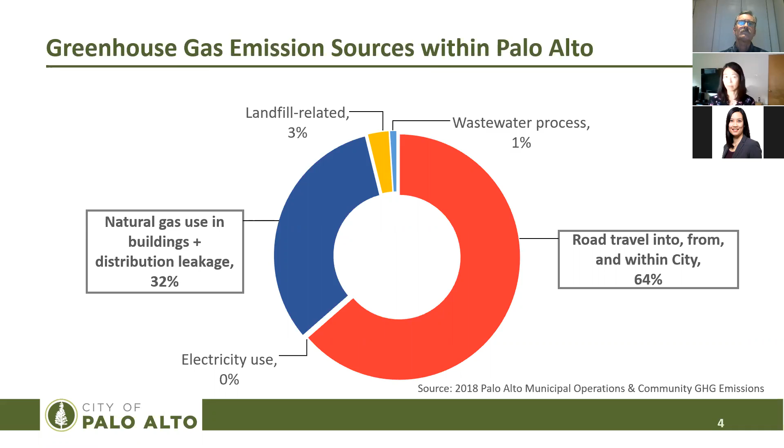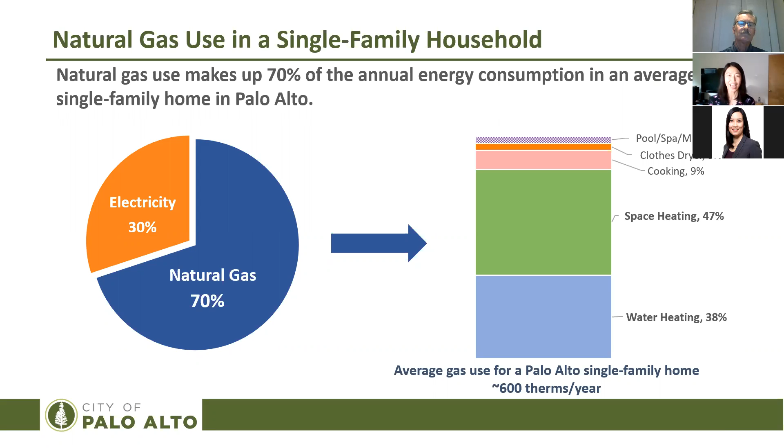So you might ask, isn't natural gas a clean energy source? Well, natural gas is a fossil fuel, and it's usually found in layers of rock formations or in tiny pores within shale formations. Shale gas is extracted by a process called fracking, which is a controversial topic because of its damaging environmental impacts. Natural gas is a mixture of hydrocarbons, primarily methane. It also contains natural gas liquids, such as ethane, propane, and butane, and traces of nitrogen and hydrogen sulfides. Natural gas has no color and no smell. However, a sulfur-based odorant is added to give it a rotten smell, which allows people to easily detect gas leaks.

Burning natural gas produces carbon dioxide, which is a key source of greenhouse gas. Other combustion byproducts include carbon monoxide, nitrogen oxides, and sulfur oxides. These pollutants are harmful to your health if the vents for the gas furnace, the gas water heater, and fireplace are not properly installed or maintained. Cooking with a gas stove without proper ventilation can result in unhealthy levels of nitrogen dioxide inside the house, and this can increase the risk of respiratory issues such as asthma.

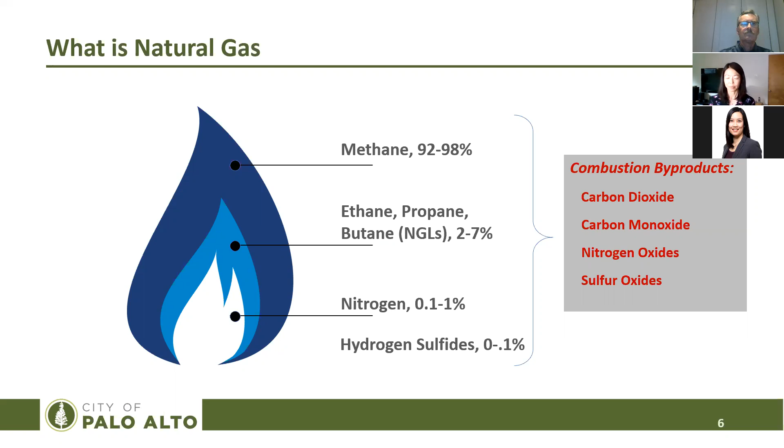There's another problem with natural gas. The natural gas system, from production to transportation pipeline, down to the gas appliances in your home, is leaky. Around 2 to 3% of the methane is leaked from the production and transportation of natural gas into the atmosphere, and then another 0.5% of methane is leaked inside the home. While these percentages may not sound like a lot, methane is a very potent greenhouse gas and has a global warming potential that is 86 times higher than carbon dioxide over a 20-year period.

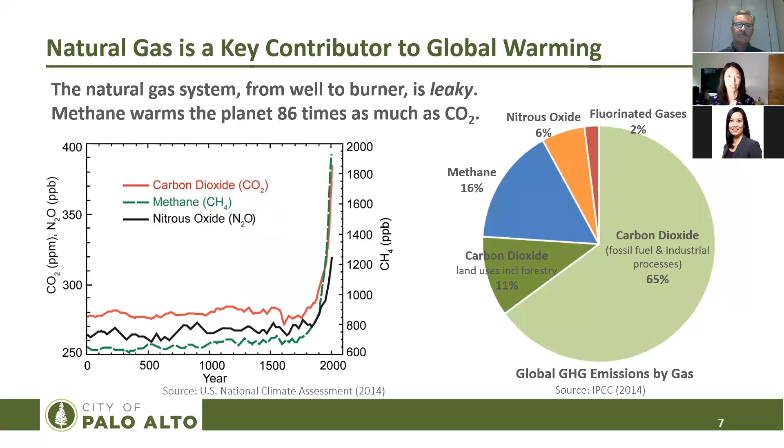So let's turn now to look at where Palo Alto's electricity comes from. Palo Alto electricity has been 100% carbon neutral since 2013. This means that electricity supplied by the city of Palo Alto comes from clean, carbon-free sources, including hydroelectric energy, solar energy, wind, and biomass energy. Palo Alto does not have any long-term power contracts for gas-fired electric generation. At the state level, California has already phased out coal-fired electric generation. By 2045, 100% of the California electric grid will be carbon-free.

With all electric appliances, you get the peace of mind that there will be no risk of gas leaks and no unhealthy combustion byproducts. Also, since there's no open flame from gas appliances, there's also a lower fire risk. So choosing electric is better for your safety, better for your health, and better for the planet.

There are some very efficient electric alternatives to gas appliances, and I'll be focusing on two proven technologies that have been around for decades and are well suited for home applications.

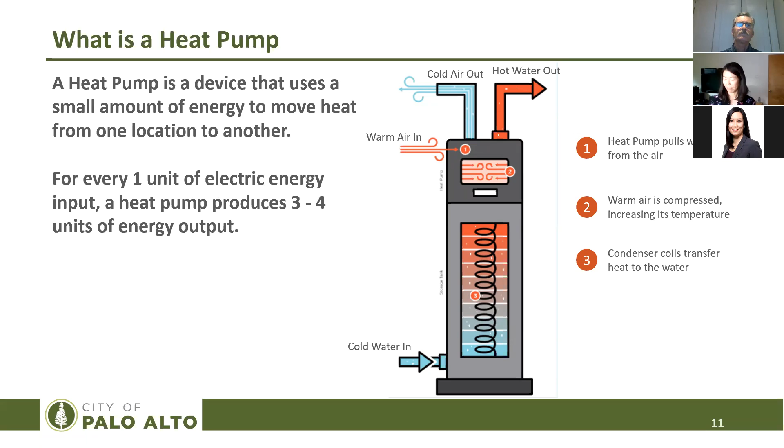So next, we'll look at how a heat pump water heater compares with gas water heaters. All gas water heaters have a flue pipe to send the exhaust gases outside the house. However, there is a risk of backdrafting, which means the combustion gases flow back inside instead of out through the flue pipe. Backdrafting could happen when the air pressure inside the house is lower than the outside. The combustion gases contain carbon monoxide, which is lethal, and that is why California law requires carbon monoxide detectors in homes.

Let's compare the efficiency of different types of water heaters, which is rated using the energy factor. The higher the energy factor, the more efficient the water heater is. Heat pump water heaters have an energy factor that typically ranges between 3 and 4. The energy factor for gas water heaters, on the other hand, is always less than 1. Usually between 0.6 to 0.7 for tank style and 0.9 to maybe 0.95 for tankless models.

Heat pump water heaters also provide smart controls that allow you to remotely control the water heater or save energy when no one's home by setting to vacation mode. If you have a rooftop solar system at your house, you can program the heat pump water heater to run during the hours when you have excess solar output from your PV system.

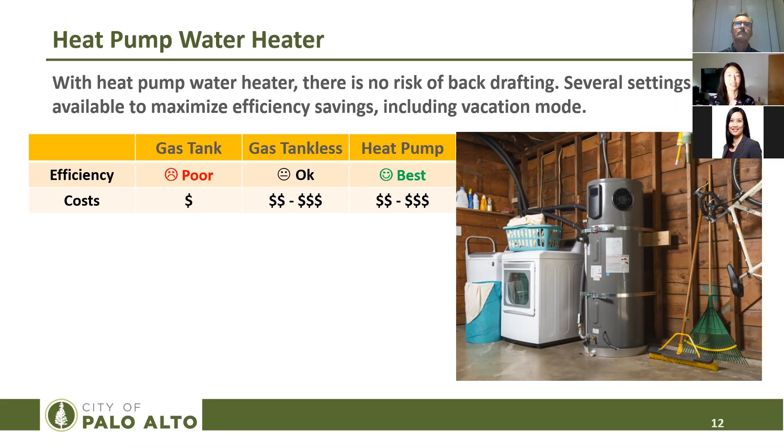So next, we're going to talk about another heat pump application for your home, the heat pump HVAC. A gas furnace can provide space heating only, and an air conditioning system can provide cooling only. A heat pump HVAC can operate in both space heating and cooling mode, and very efficiently.

It also provides good air filtration, which can be very important given the poor air quality we've had over the past few months. Heat pump HVAC systems have two parts: an indoor unit, which is the air handler, and the outdoor unit, which is the heat pump. We'll go over two types of heat pump HVAC systems.

The first type is a mini split. A mini split can have multiple indoor units and does not require ductwork. So they work well for homes with no ductwork and for room additions. The indoor unit can be installed high on a wall or on the ceiling. Mini splits have been around for decades, and they're very popular in Europe and Asia.

The second style is the central heat pump system. If your house has a central gas furnace, then a ducted central heat pump system would make a good fit for your home. Leaky ducts, however, are a common problem and can lose 20 to 30% of the air that moves through the system. So we recommend that you have your ductwork serviced on a regular basis to minimize air leaks.

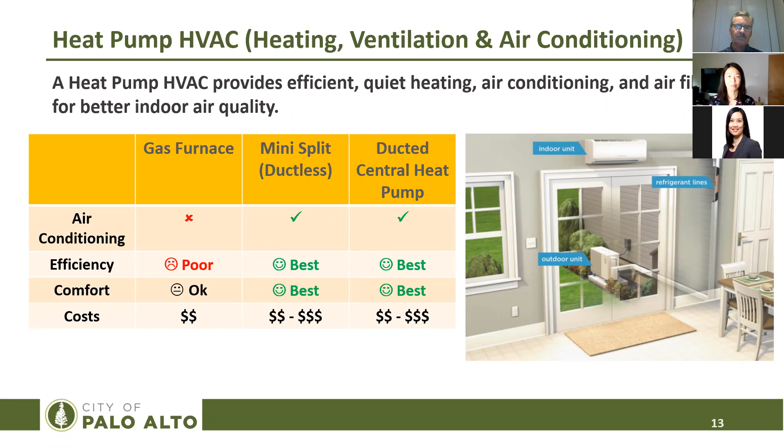Next, we'll turn to cooking. For cooking, we're recommending induction stoves as an efficient alternative to gas stoves. An induction stove uses electromagnetism to create heat inside the cooking pan.

These are not the old electric coil stoves from the 1950s era. The surface of the induction cooktop is usually made of a tough, heat-resistant glass ceramic material. They look like electric smooth-top burners, but the cooking surface never gets hot. When the pan is placed on the cooking zone, the magnetic field induces electrical currents inside the pan, and that heats up the pan. There's no energy lost to the surrounding air.

For cookware, they need to be made of a magnetic material. Cast iron and stainless steel pans work well with induction stoves. If you want to know whether your pots and pans are compatible, you can test them by sticking a magnet to your pan. If the magnet stays on, then it is induction compatible.

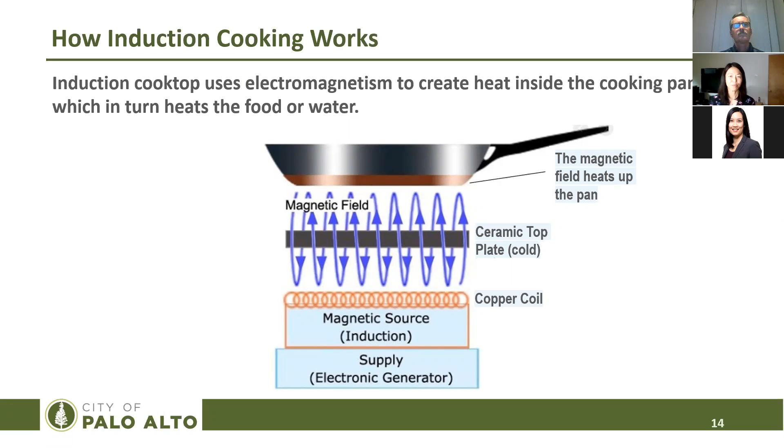When cooking with induction stoves, there are no unhealthy combustion byproducts, and you don't have to worry about the kitchen rag or your copy of a recipe catching fire. There are many online videos that show induction stoves heat faster than gas stoves.

I will now turn over to Scott to talk about how to plan for your home electrification.

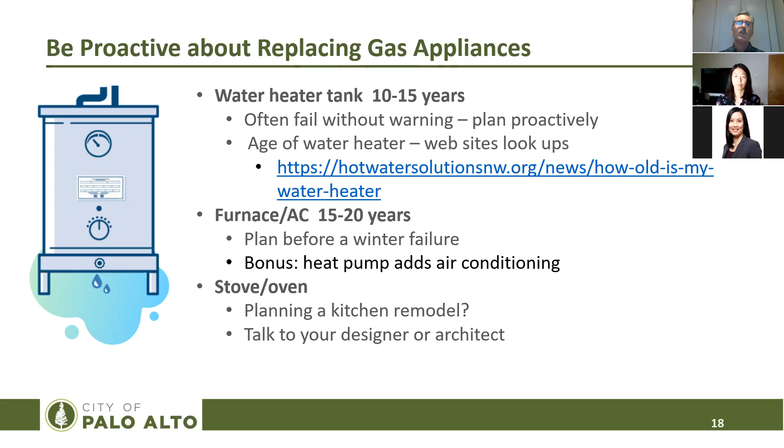So once you know the age of your appliances, you're on the path to electrifying your home. If you've not remodeled and live in an older home, you may need to consider the electrical panel. That's the box on the side of your house with the circuit breakers, or maybe even fuses if you have a really old house. Its capacity may be a factor in this journey.

Most older homes have a 100 amp panel; remodeled, upgraded, and most newer homes will typically be 200 amps. Because your home's comfort and efficiency are heavily dependent on your home's building shell or envelope, that's often what we call insulation, it's important to take into consideration when planning your heating and cooling system.

Most gas furnace systems are grossly oversized, and so your heat pump sizing will be designed to properly meet the home's comfort needs. Smaller equipment is less expensive to purchase and less costly to operate. A well-insulated, sealed home needs less heating, needs less cooling, and is therefore more resilient to temperature fluctuations.

So your steps might be to consider these next actions. You may need to upgrade your electrical panel.

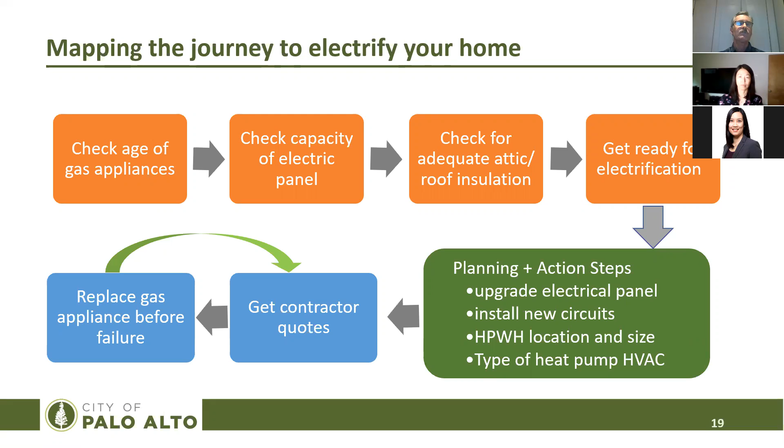So if you want to replace your gas appliances before they fail, you can start by getting some contractor quotes.

So all these steps I just outlined, they might sound daunting, but don't get overwhelmed or intimidated. Just contact the Home Efficiency Genie. Since 2015, the Genie has been Palo Alto utility customers' trusted advisor. If you want to take the first step to electrifying your home, the Genie is here to help.

They offer free, over-the-phone electrification and efficiency advice to all Palo Alto customers. For a nominal fee, they can provide a comprehensive service called a Home Electrification Readiness Assessment. That will evaluate your panel capacity, your existing appliances, and how to plan for more electric appliances. They even can provide a list of electricians who are familiar with panel upgrade projects in Palo Alto.

The Genie also offers independent advice on upgrade projects, including upgrading your insulation and home air sealing, changing your furnace for a heat pump system, or planning for a heat pump water heater.

The Genie maintains a list of qualified vetted contractors who specialize in electrification and home performance. The Genie advisor will not only help you find the contractor, but they can also provide guidance and independent reviews of any bids you receive from those contractors. And this advising service is provided by the City of Palo Alto Utilities just for you.

So your takeaway is start with the Genie. Their web address is efficiencygenie.com. And we'll actually include the Genie web address at the end of the presentation as well.

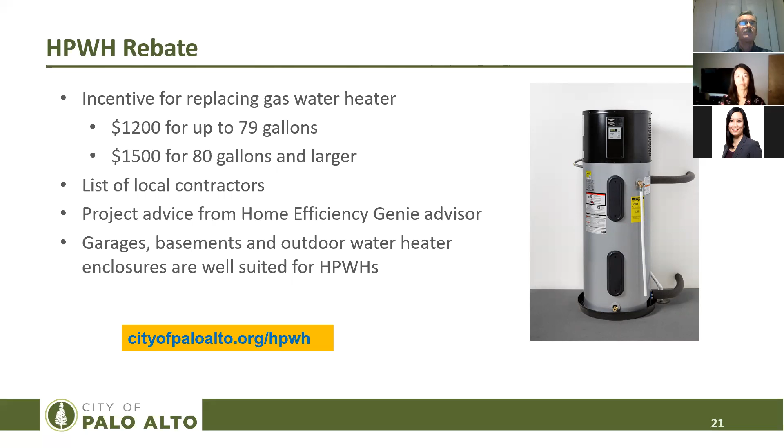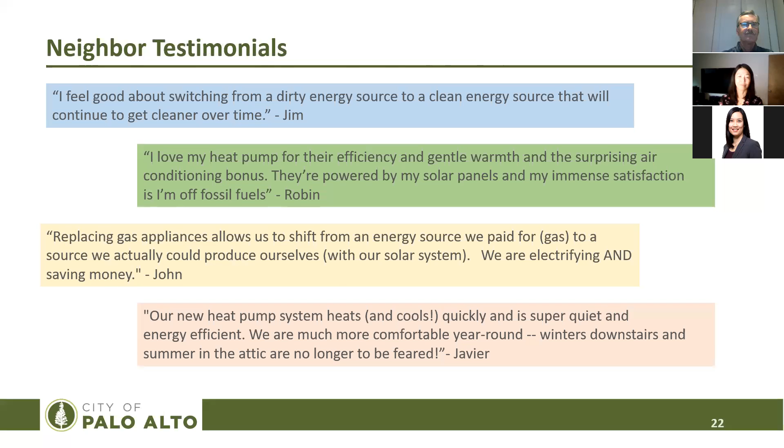So we've covered a lot of material and concepts tonight, but I want to provide you with a concise summary, and these are really your key takeaways.

All electric homes are cleaner for the planet, plus safer and healthier for you. There are many very efficient electric alternatives to gas, and these electric technologies are mature and well proven. And lastly, make a plan for your electrification journey. And you know the Genie is here to help, so feel free to contact them.